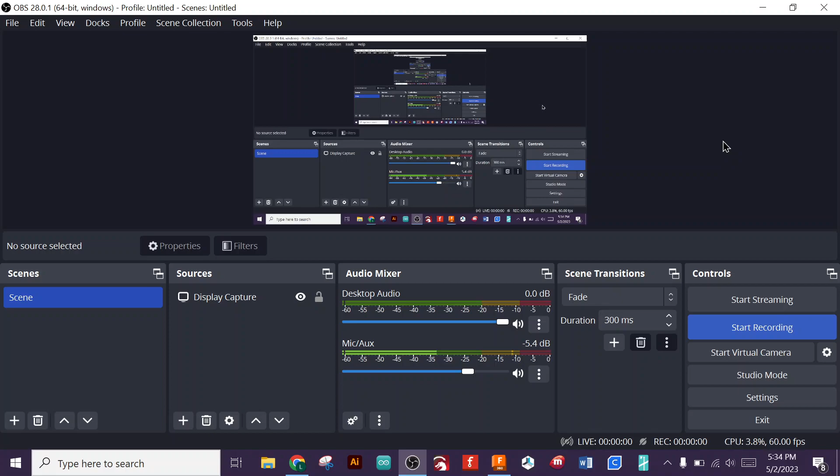Okay, we're going to start modeling in Fusion 360 from a real life example. This right here is just a SketchUp model of some snap cubes, and I put the dimensions in. I actually measured a snap cube model and then typed in the dimensions. You guys will do this on your own, and you'll have these dimensions on a piece of paper. I just want to show you what you would have in your hand.

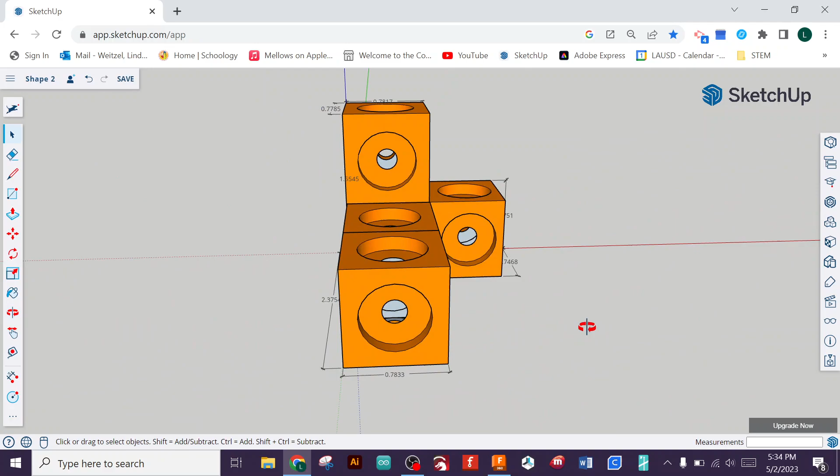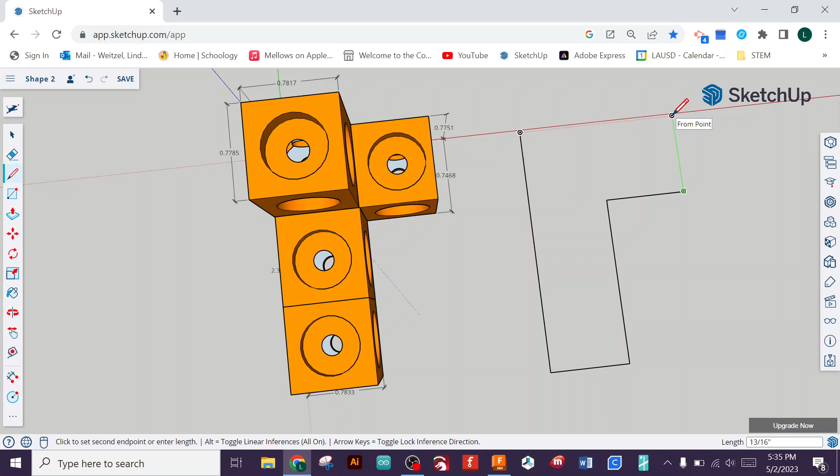So we want to think about how we would model this in Fusion 360, because Fusion 360 uses sketches. If we look at it from the top, we have an L shape right here. So what we're going to do in Fusion is draw an L shape using those dimensions, coming across, going up. Then I'm going to type in all those dimensions. I'm just showing you the workflow. Then we're going to push-pull, and we're going to come up these dimensions here. So it's going to be whatever that is.

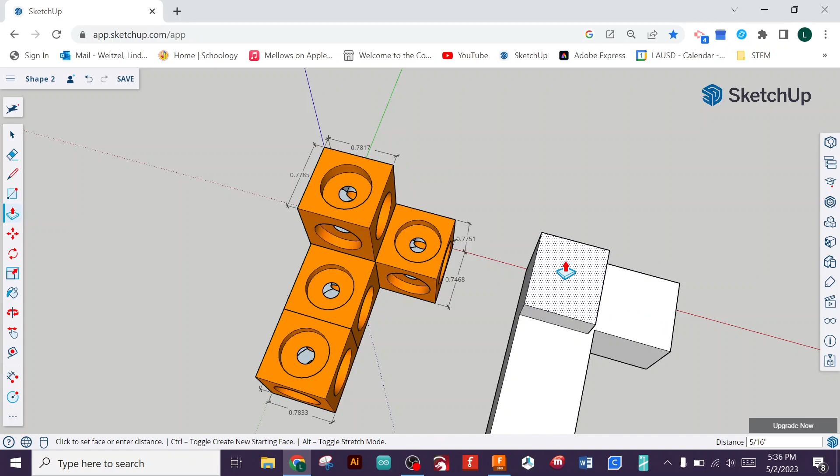And then we have dimensions on the top, these guys up here. So we're going to go back to the line tool. I'm going to put in those dimensions, whatever it is. And then we're going to come across here, and maybe it doesn't 100% line up, and that is totally fine. And then we're going to push-pull however high this is right here, and just kind of model our shape. Now, real life doesn't snap, even if you have a little gap there. If that's what you measured, then go with that. So that's kind of what we're going to do, but in Fusion 360.

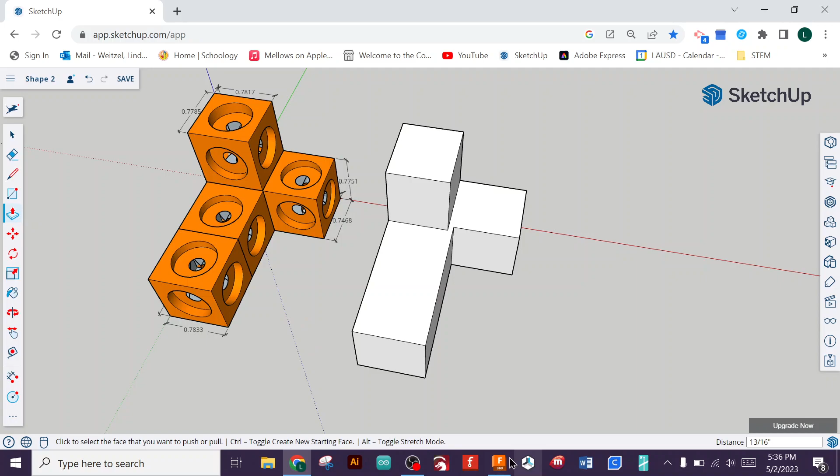So using all of these measurements, which I had actually written down on a piece of paper, we're going to go to Fusion 360 and open up a new design. We want to go to document settings and change this, making sure it's in inches. And for goodness sakes, make sure that you are signed into your account. If you're not, adjust that please. I want you to save this - we will go File, Save, and you're going to name it Example Snap Cubes.

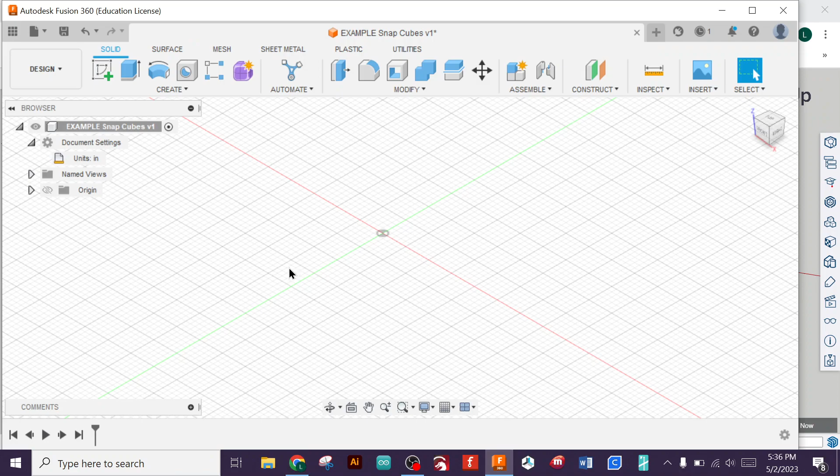So our first plane, we want to do that kind of on the ground, the same way we did with SketchUp. So our first plane, we're going to do a sketch, and it's going to be on that ground plane right here. And then I'm going to move that over.

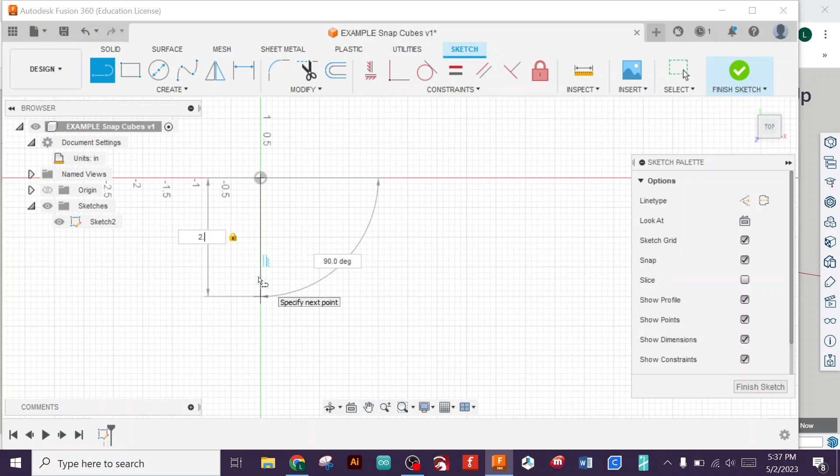We're going to use the line tool, and I'm going to input the lines, the measurements that I have on my piece of paper. Your measurements will be different - don't type these in, okay? I'm just going by what I got. Adjust these so they kind of look nice. We can zoom in a little bit.

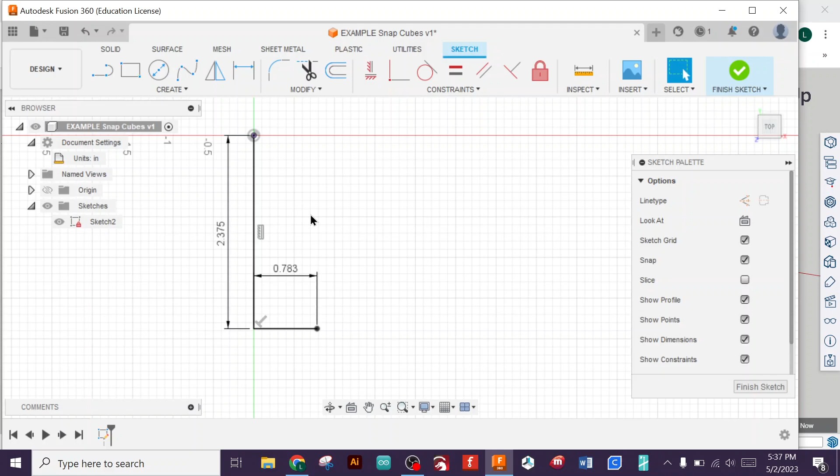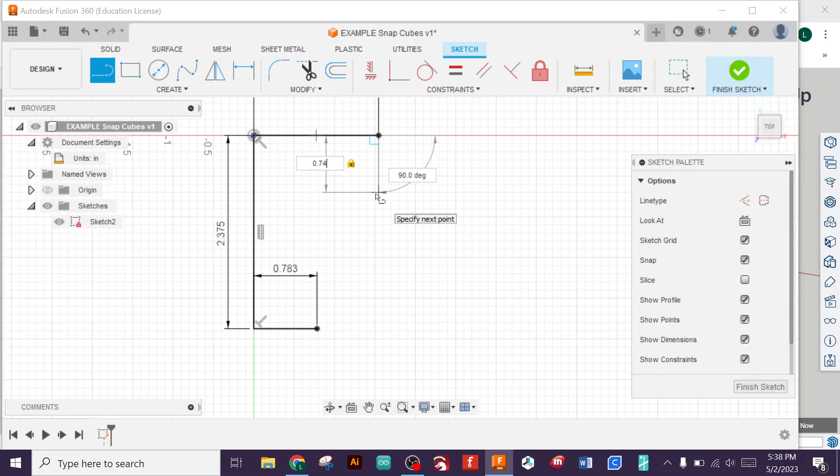We're going to tap L for the line tool, click over here, put in your dimensions - 7, okay, we're going to do the top piece up here, all the ones that I measured. Again, yours will be different because all the snap cubes are a little bit different.

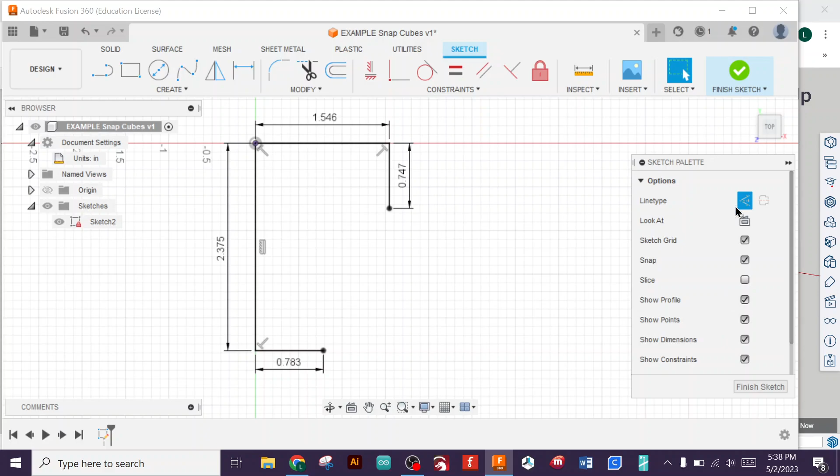We want to actually push the dimensions outside of the shape. Now, we don't have dimensions for this inner part of the L, but that's okay - we're going to use construction lines and use that line tool again. I'm just going to go up at a 90 degree angle and have the software work for us. So just go across - oh, I don't want 90.3 degrees.

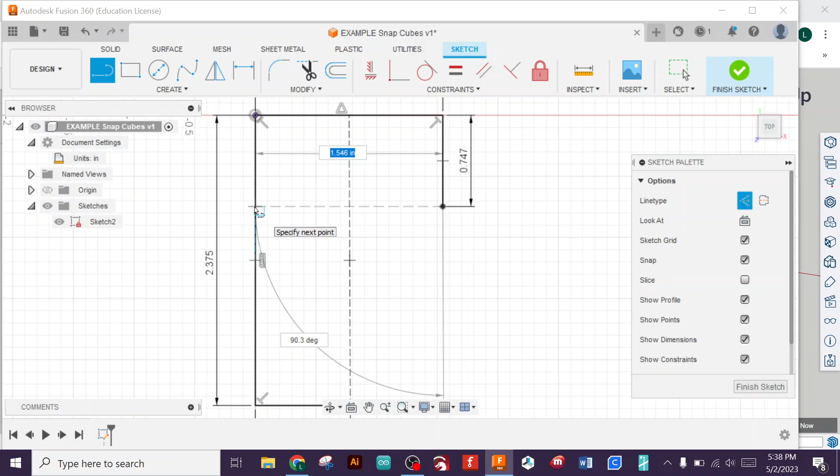Okay, that's a weird... okay. So yours may not do that. Yours might snap exactly to 90, but it was kind of, it just looked funny.

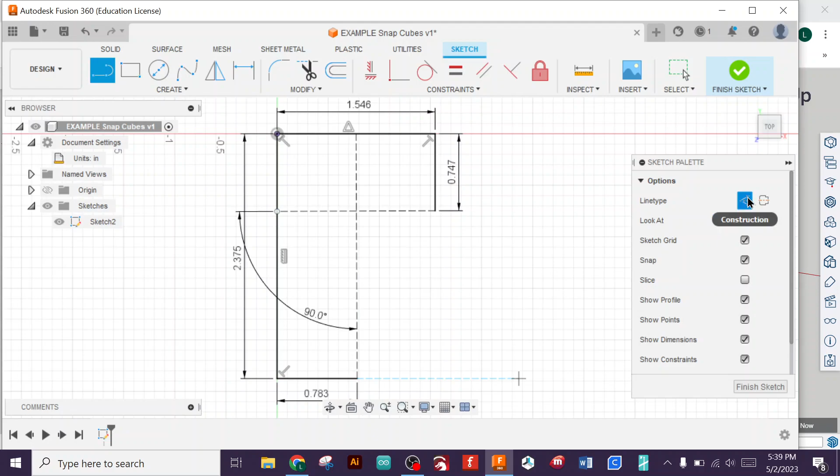So I'm going to do the line tool again, and turn off the construction lines. I'm going to retrace this, and then click here. So I wind up with this shape, my bottom L shape.

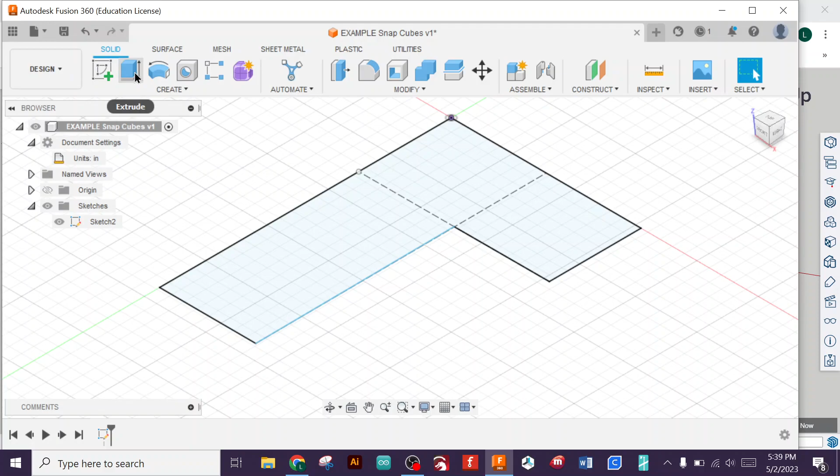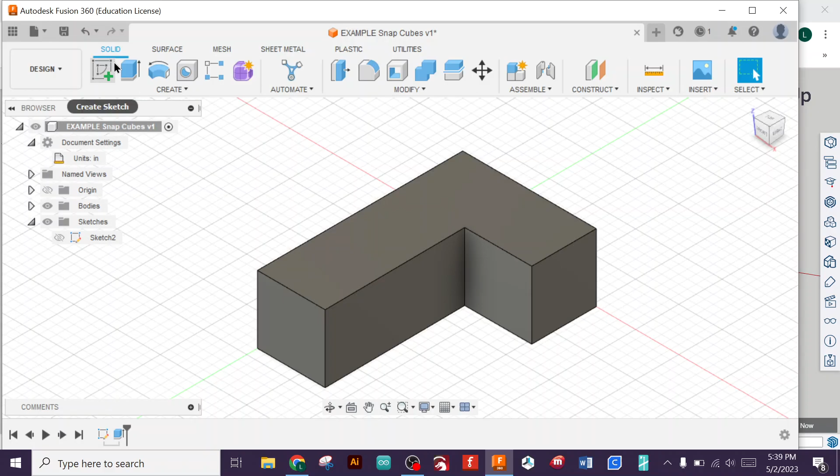Okay, and now the next sketch we're going to do just on the top here, just like I was showing you guys. So I'm going to select this top. Make sure you hit save often and use a saved. That's great. So we're going to go line. This one is measured.

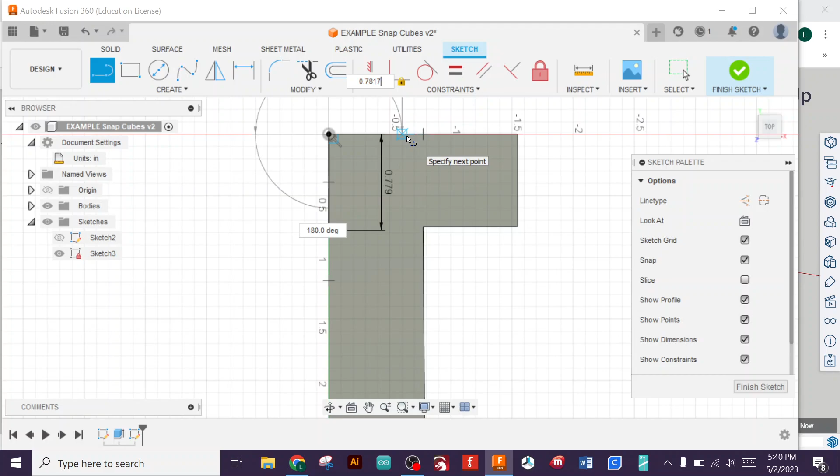Okay, and then we got another one. Again, I'm going to move these guys out because I don't like them on the inside of the shape. Now I'm going to do that same thing with the construction line where I just draw a construction line out. You can see it overlaps a little bit, and that's fine because we're measuring it within tenths of a millimeter.

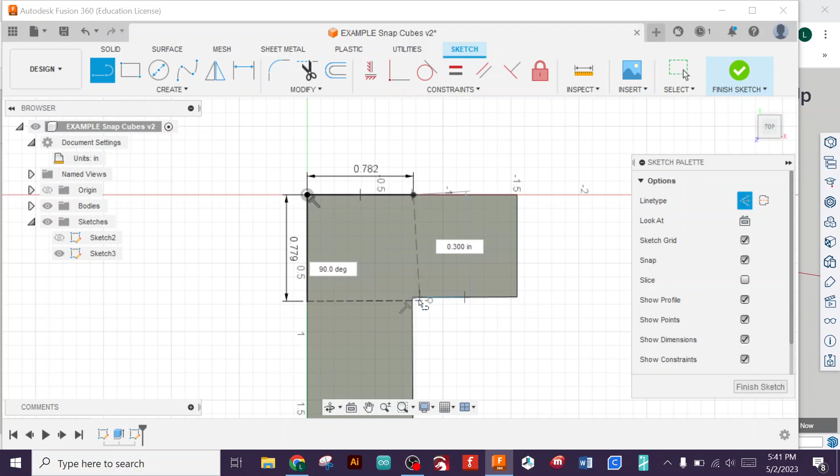So go L, go down. I want to go where it intersected there. And see, it overlaps a little bit, and that's okay. The plastic is, it's a little funny.

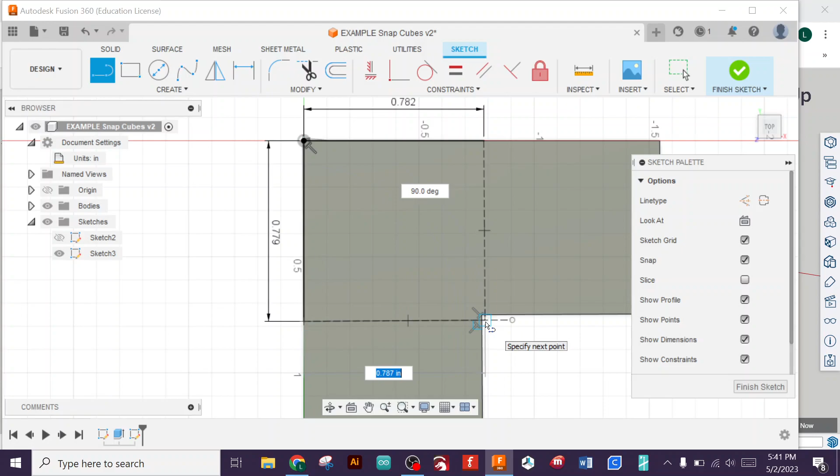So now what I'm going to do is turn this off and retrace those lines because I want to figure out where they intersected. Boom. Okay, finish sketch, and that's what I wanted.

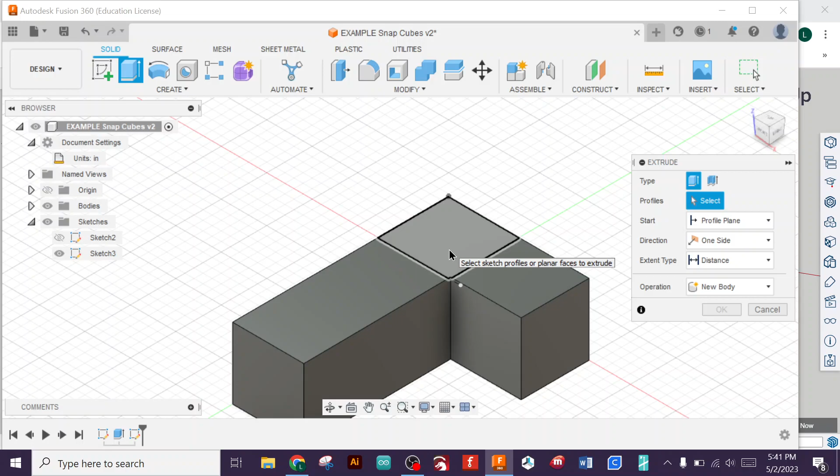Okay, I'm going to go back to the little house. All right, I have to do the math to figure out how high to drag this up, so you want to be careful here. So my math was up.

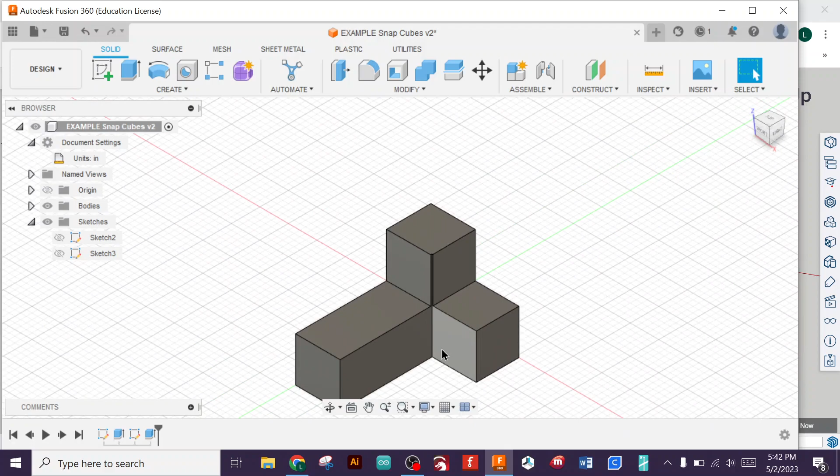Okay, and that was my shape. And I get a little gap here, and that is okay. All right, so we're going to save that.

Okay, I want you guys to turn this some kind of cool color. We're going to go appearance, maybe the same color as your snap cube.

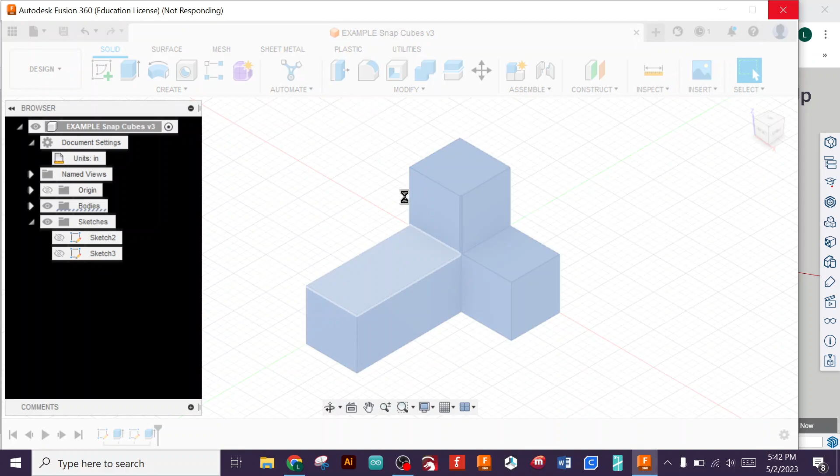Please don't crash. Hang with me. Oh no! Well, I already saved it, so okay. I'll be right back once it stops crashing. Wowzers, you guys! My computer just got so hot.

Okay, so one more time. Make it look like something cool. I think that's what I'm trying to ask it to do.

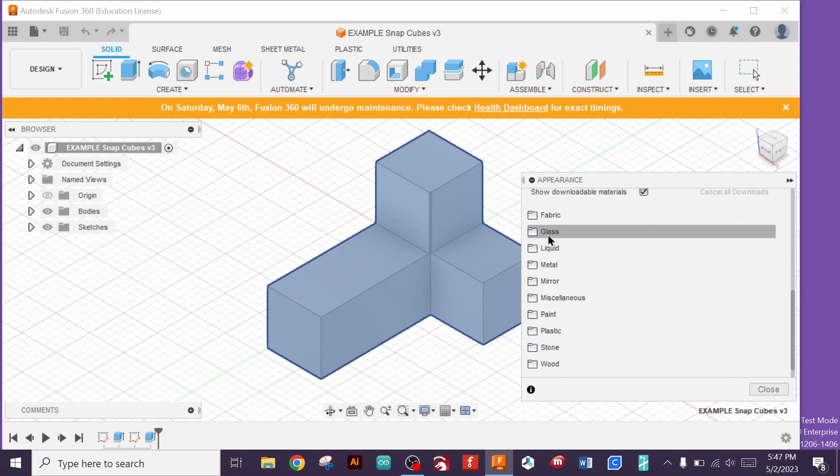Yeah, it was bad. Let's turn this into glass. Let's just see... oh no, that looks terrible. Okay, I don't know, make it look like something fun. Or even just paint, go glossy, do an enamel red.

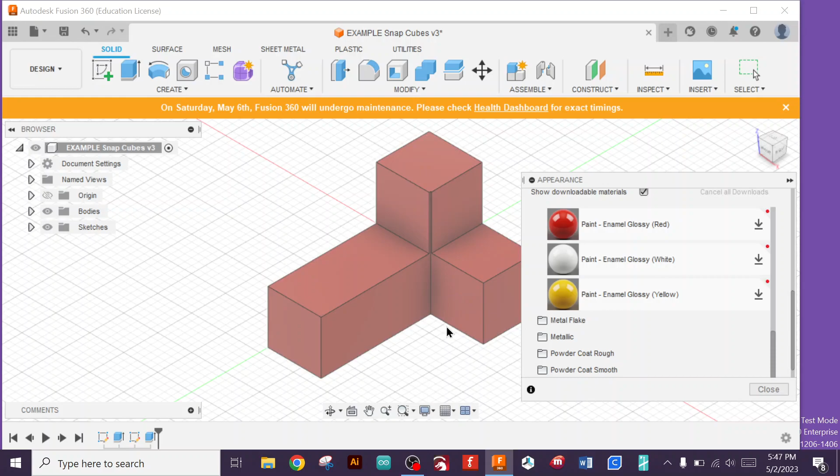How's that? Okay, so what we're going to do now is you drop these sketches open. Now there's this cool feature where if you right click on this, there's a thing that says show dimension, and you can turn on the visibility and it will show the dimension.

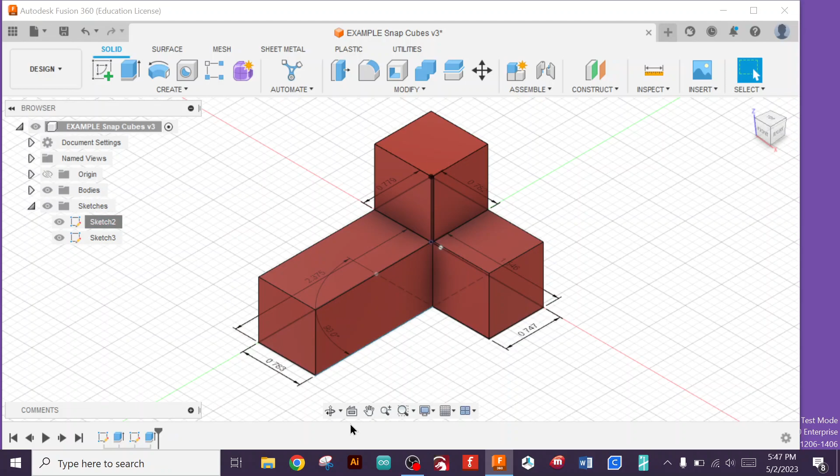So I can turn on the visibility on that guy, right click and hit show dimension. And that gives me, it should look exactly like my worksheet page.